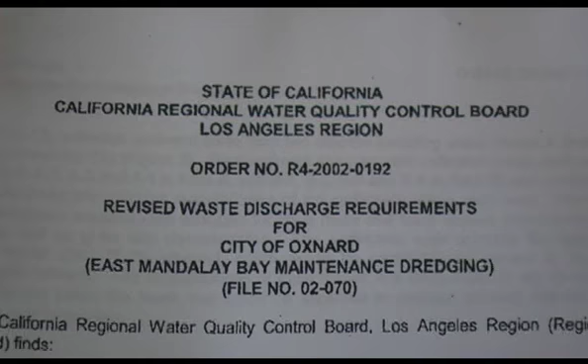The environmental permits issued for the dredging project placed tight limits on the quality of the dredged water. Because turbidity was sharply limited, it would be necessary to treat the water removed from the bay before it could be discharged back into the bay. In addition, the leakage of any fuels or oils from the dredge onto the water during operation was strictly prohibited.

I was approached by some environmental groups about the permit for the dredging project, and they were very concerned because of the description of the project as this large centrifuge, and it scared everybody, and they thought it was going to be a big polluting nuisance on the farm field. It was going to be an ongoing problem, and I was a little concerned about it. And when the project finally came, we were all very relieved that it was a very quiet, environmentally friendly project, and that the centrifuge is hardly noticeable, just a small little device, and it posed no environmental problems.

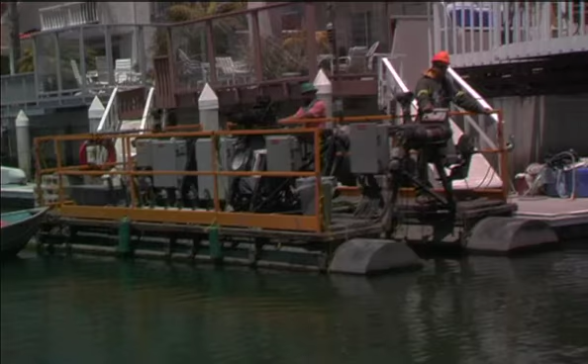After reviewing the technologies and bids provided by several dredging contractors, the city decided to go with Eveready Industrial Services from Edmonton, Alberta. Eveready's dredging technology and equipment met all of the tough environmental requirements and addressed all of the property owners' concerns.

I belong to the Channel Islands Waterfront Homeowners Association, and I'm on the board of directors, and my expertise is waterways, so that's what I'm in charge of. About 4 years ago, we knew that we needed our waterways dredged. The city was looking at a clamshell dredging process, and we were afraid that this would involve damage to our docks, possibly the boats. It was just too big, too bulky, too messy. And we looked into it and liked what we saw, and we started interviewing. And we're glad we discussed this and made up our mind on this process.

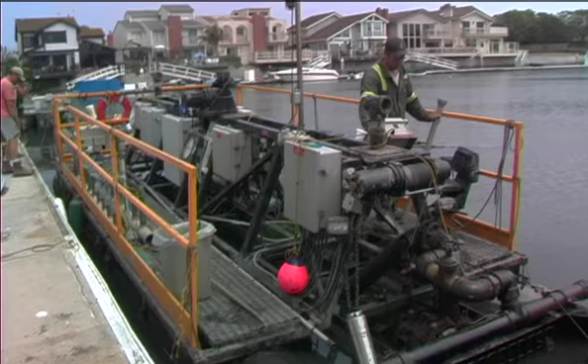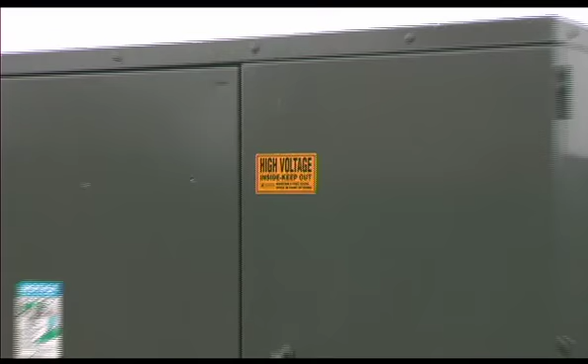To understand how the technology works, let's start with the dredge. The Eveready technology is significantly different from conventional dredging. The dredge works quietly and efficiently using only electric motors. No diesel engines or hydraulic equipment are used, removing the possibility of spilling fuel or hydraulic oil into the water. A floating electrical cable carries power from the shore to the equipment.

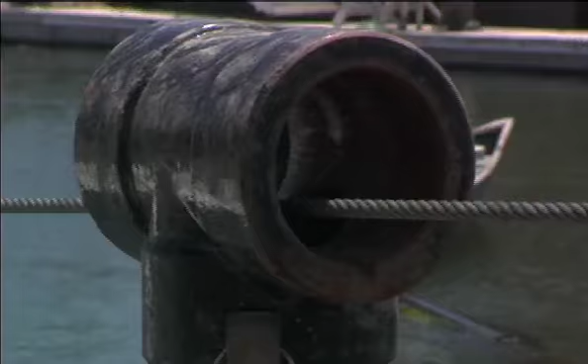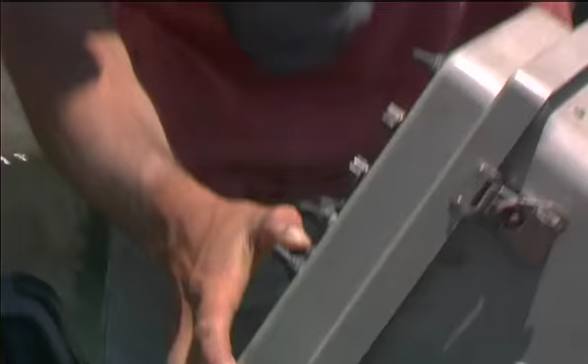To control the movement of the dredge, a steel cable is used to guide the movement of the dredge through the water. As the dredge moves quietly along the cable, a controlled thickness of sediment is removed from the bottom of the channel using a suction cutter head. The dredge operator controls both the speed of the dredge as it moves along the guide cable and the depth of the cutter head, which is controlled by a precision hoist.

As work progresses, the dredge operator receives updates on the depth of the tide and carefully adjusts the depth of the cutter head to maintain a constant cutting elevation. This proved to be particularly critical in Mandalay Bay, where the tide changes significantly during the day.

Note that the dredge material is sucked up off the bottom of the channel by the dredge and pumped ashore in the dredge pipe that trails behind the dredge. This minimizes the spread of any contaminants that may be in the sediment into the open water of the channel.

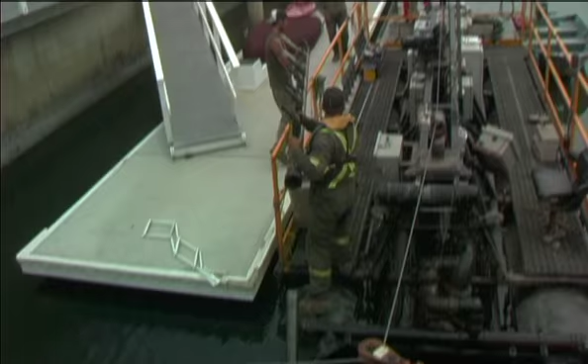To dredge the channels without moving the docks, Eveready developed a unique dredging procedure. Special equipment is used to pump water over the bottom of the channel, pushing sediment out from under a dock into the channel. Using this approach, it was possible to remove sediment which had collected under the docks without moving the docks.

No, we didn't have to move our docks. They have a technique of blowing the soft material out with a pressure hose and then letting it settle, and then they come back and pick it up from a barge with a dredge cutter underneath it, and that's a pretty good thing too, because moving a dock would cost each homeowner probably $500 or $600. This reduced the amount of time needed to dredge the channels and prevented damage to the docks.

But Eveready, as you well know, has a system that goes under the docks and blows the leaf and the various decaying material back into the center of the channel. Yeah. So it was a neat little tool that allowed for the docks not being moved. Right. In the early days, years ago, with the clamshell, we indeed had to move docks.

Right. Because the dredge is so quiet, it was able to operate from 8 a.m. until 10 p.m. without disturbing people living in waterfront homes next to where the dredge was working. This also reduced the time needed to complete the project. In addition, no single channel was closed for longer than 2 weeks.

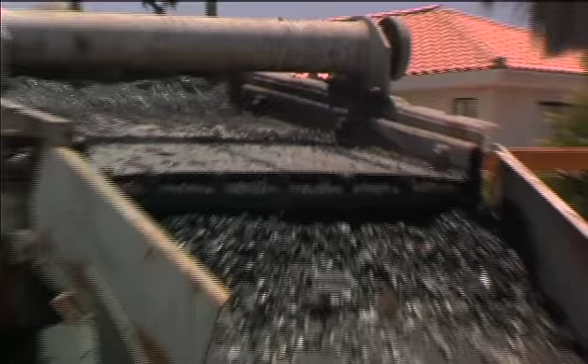To begin the treatment process, dredged material is discharged onto a shaker screen, which separates out the larger particles that would interfere with the treatment process. Dredged water and material that passes through the shaker screen enters the mix tanks, where a special water treatment aid called a flocculant is added.

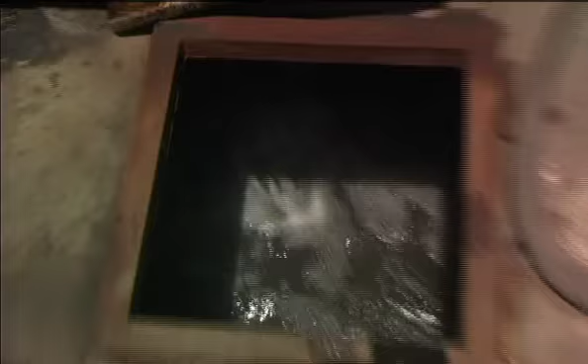From the mixing tank, the dredged water and material is pumped into the 2 specially engineered dewatering centrifuges, which separate the water from solid material. The operation of the centrifuges, which is based on extensive experience, is optimized to maximize the separation of water and dredged solids.

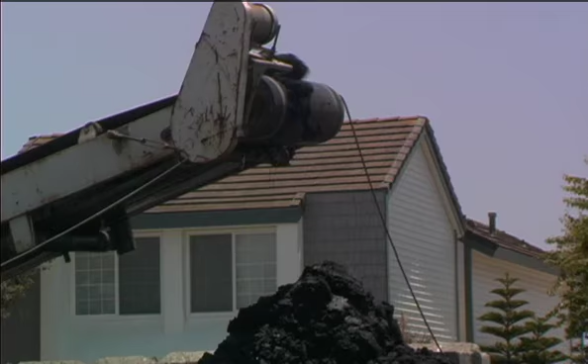Solid material is discharged from the bottom of the centrifuges onto moving conveyor belts, which dump the material into a common loading hopper. Another conveyor carries material from the bottom of the hopper to the top of the material stockpile. As you can see, the processed sediment from the channels is relatively dry. Testing of the material shows a solid content of between 50 and 60%.

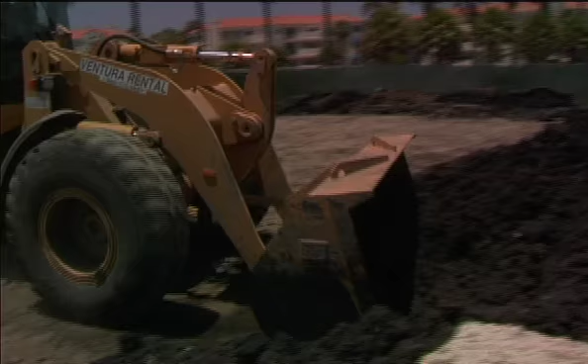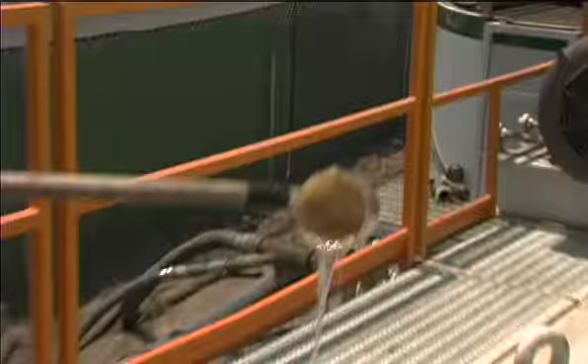By reducing the water content of the sediment, the volume of material requiring disposal is reduced, thereby saving on disposal and trucking costs. In addition to converting the dredged sediment into a high solids cake, the centrifuges produce a treated water that is remarkably free of solids.

By adjusting the amount of flocculant added to dredged water before dewatering in the centrifuges, the clarity of the water is readily controlled. Weekly testing conducted over the course of the 8-month project did not detect one exceedance of the water quality standard in the environmental permit.

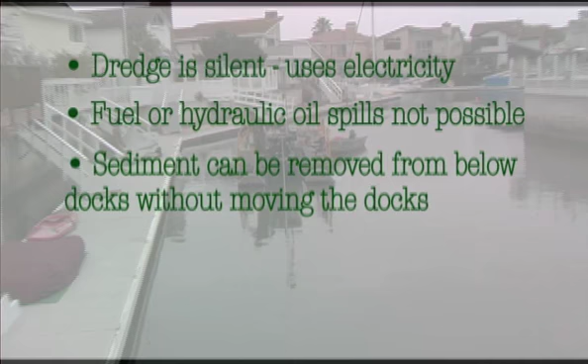Now that you've seen both the dredge and the treatment plant, we can summarize what you have learned. Let's start with the dredge. The dredge operates silently using only electric motors. Fuel or hydraulic oil spills are not possible. Sediment can be removed from below docks without moving them. The depth of the dredging is tightly controlled, even when working in tidal zones.

The spread of any contaminants in the sediment is minimized because the dredge sucks the sediment off the bottom of the channel and pumps it ashore through a closed pipeline. Extended working hours are possible, even when working next to waterfront homes, because the operation is so quiet, reducing the time needed to complete the project.

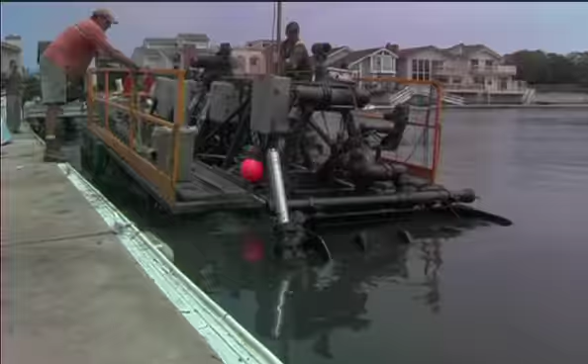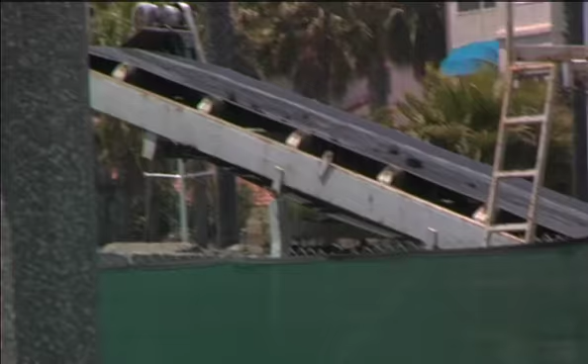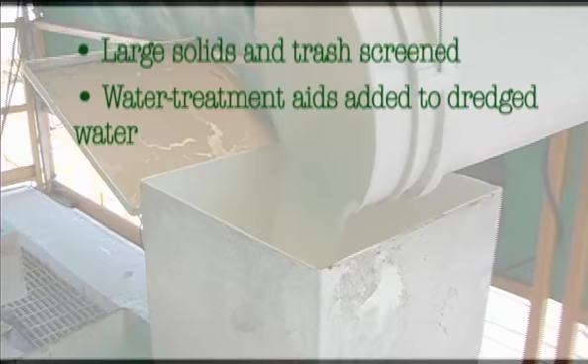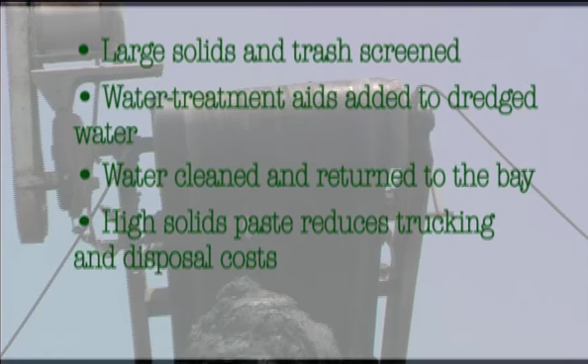Turning to the shore-based treatment plant, we now know larger solids and trash is screened out of the dredge discharge before treatment begins. Water treatment aids are added to the dredged water and solids before dewatering begins. The centrifuges produce clear water that can be discharged back into the bay. The centrifuges also concentrate the sediment into a high solids paste, thereby reducing the volume of material requiring disposal, which reduces both the trucking and disposal costs.

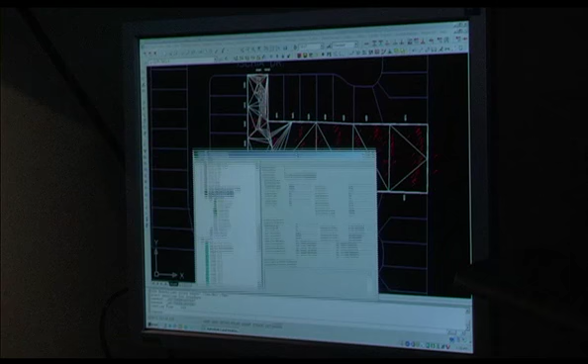To confirm that the dredging has been conducted properly and meets the contract requirements, we need to perform a post-dredging survey of the work. The best way to do this is to call upon the services of a licensed surveying firm with experience in underwater surveys. The surveying data can be used to produce profiles or sections of the dredged channel. If a pre-dredging survey is also conducted, the data can be used to determine the volume of material removed.

It all begins with collecting the data. The field crew uses a survey rod equipped with a GPS locator and a laser-operated transit located on the shore. To collect data, the survey rod is moved to a location in the channel where a bottom elevation is needed. When the desired location is reached, the rod is held upright in the water, with the rod resting on the bottom of the channel. A footpad at the bottom of the rod allows the rod to sit on the surface of the sediment without sinking in.

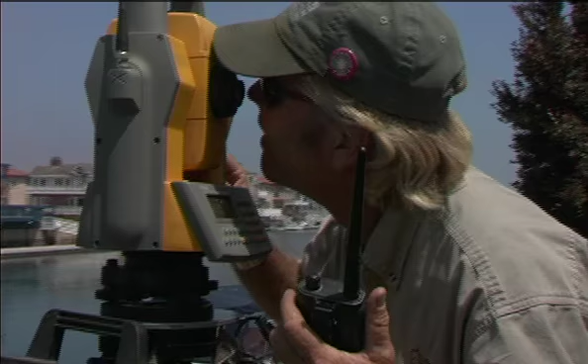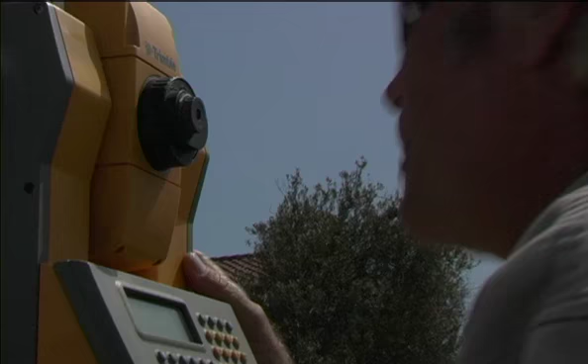The transit operator, located on shore at a predetermined elevation, aims the transit directly at the top of the survey rod. A computer inside the transit converts the data into a channel elevation at the location of the survey rod. By collecting elevations in a straight line along the bottom of the channel, a section drawing can be made. In addition to collecting data along a straight line, the survey crew can collect data over a wide area, making it possible to map the surface of the channel bottom. This information makes it possible to accurately calculate the volume of material removed by dredging.

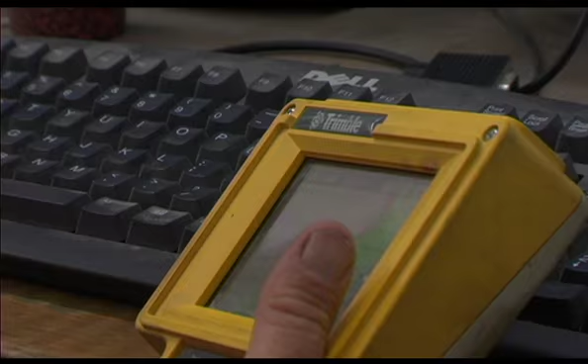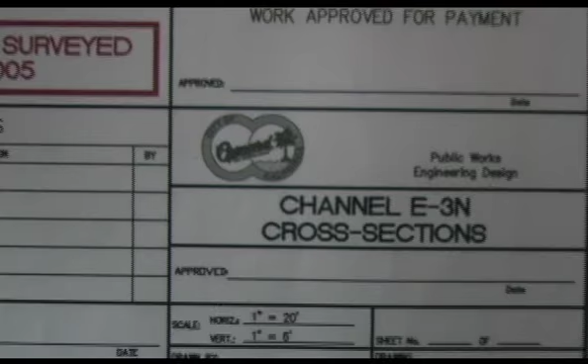After the data has been collected, it is downloaded to a special CAD program that the CAD specialist can use to generate sections and surface contours. When the drawings are done, they are submitted to the client for review and approval. Note that the actual profile of the channel bottom can be easily compared to the contract requirement. This simplifies the approval process and provides a written record that the project was properly completed.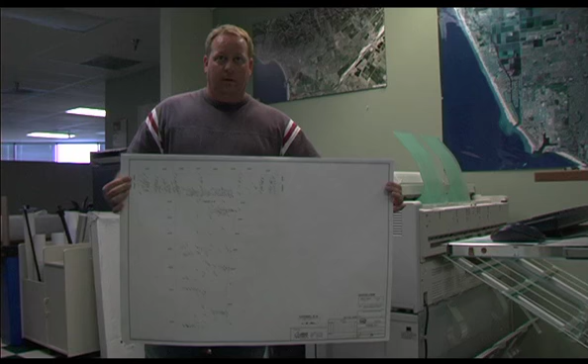I was most impressed, and I was further impressed with the team of Eveready personnel. Being at my home, I could see them work. They were skilled, they were efficient, they all knew their job, they were very cordial, but particularly their work ethics were really fantastic. That's great. Most impressive, most impressive.